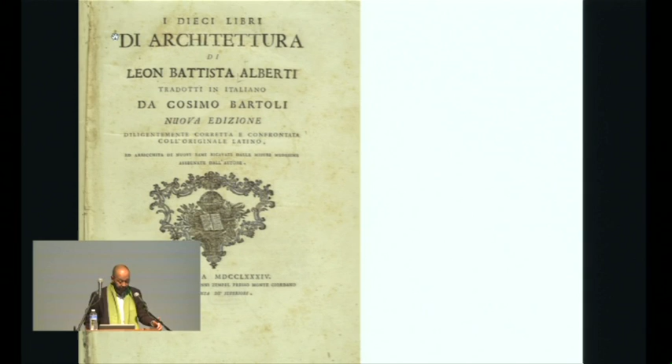And the traits that were present in the city could be applied to the house and to the design of the house. In my mind, this is actually quite problematic, and it goes in line with this notion I've developed over the past few years, which is the narcissistic idea of the architect.

The architect is actually Caravaggio's Narcissus, looking into his own reflection and unable to heed the call from anyone aside. And I would argue that vis-a-vis the city, architecture has been a kind of narcissistic figure, unable to understand that the complexities of the city escape our own professional, theoretical, intellectual capacities.

It's not that they escape in a way that architects were not actors, or even relevant actors, in the design of the city, but that we have been gazing too much in our own reflection, unable to understand the complexities of what constitutes cities and what constitutes citizenness, different from housing.

And clearly, the way that we depict a city is very much entailed in the way that we produce that city. So if we think that the city is about understanding the gaps between the public and the private, between the way we regulate even something as basic as fiscal taxes, the cadastre, we would be producing certain forms of drawings and certain forms of city-making processes, such as the Nolli map.

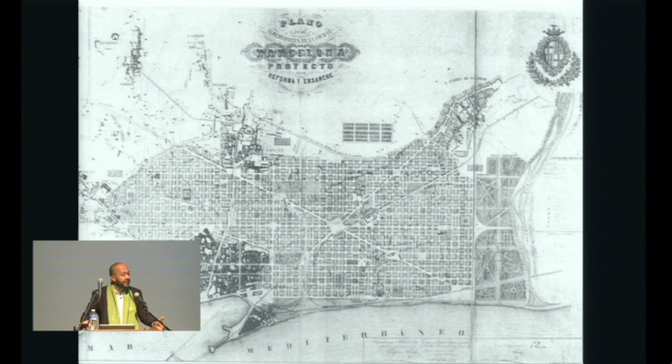And as we discussed this morning during the reviews, if we conceptualize, mid-19th century, the idea that the city is this sort of interactive realm or protocol between the private and the public, the vías and intervías, as Cerdà termed them, we're bound to produce a form of city making which we can then regard as useful or not useful anymore, as relevant or irrelevant anymore.

But it goes to this nature that because they're dynamic systems, the way that we imagine the growth of cities very much entails the possibilities of success or failure of a different city.

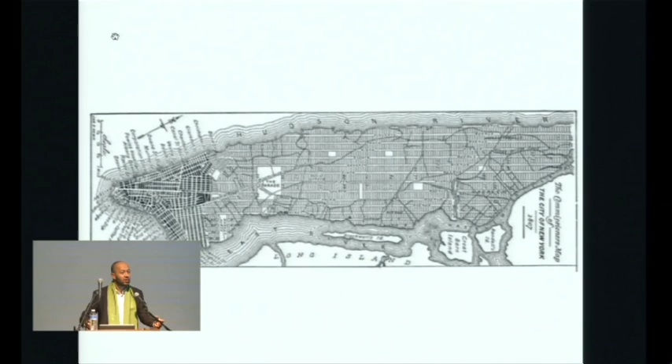If you look at the commissioner plans of New York City, this is 1812, or 1807, we would see a clear decision made about how the city would grow, and we see that something's missing, which is Central Park. The idea of what type of relationship exists between the growth of a city and its understanding of infrastructure, public space, but also land values, real estate development, is at the core of how we figure housing in this equation.

And I think that... I don't know why this keeps coming up. Sorry. No, actually, no, I'll just do this. Okay.

So to think about how we place the question of housing vis-a-vis a city and a nation, one would be tempted to quote the often cliche of the 2000s, which is the idea that we're now in an urban age, and this will be the century of cities.

Actually, for a place like Mexico, the 20th century was the century of our cities. Close to 80% of the population in Mexico live in cities. So the question of how we design policies for cities is at the core of how we imagine housing as well.

But in my mind, I've always found it problematic that the production of housing in countries like Mexico, but also the production of the idea of the large urban project, was connected to the notion of an absence of planning. In other words, when you don't plan, when you don't imagine the future of the city, you produce projects. And I'm not getting into the discussion of the project versus the plan, but I would just say that the history of 20th century Mexico City is a history of substituting the plan, and even the imagination of housing, through the large-scale project.

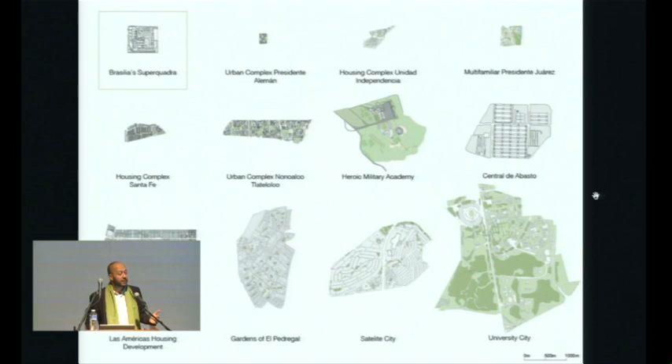And of course, you have to understand this in the context of autocratic regimes. Scale and size does matter, and scale and size becomes a substitute for reimagining better engagements with the city. This is 1946, Mario Pani gets asked to do 200 units of housing, and he builds 1,000 units, drafting another piece of early 20th century avant-garde architecture.

And Pani is, of course, emblematic of this transition and this evolution of the understanding of housing, because even, let me go back, even as complex as one would say this housing project is, it had all the ground floor full of services. It had child care facilities, a clinic, and a pool.

In a way, it was trying to understand how the city could be collapsed into the project of housing. And this idea remains very much for at least 20 years as the core way to understand housing in the city. Probably the last and most dramatic, the high point of this relationship is 1961, 1963.

with the production of 13,000 housing units in Tlatelolco. This is emblematic, and this goes back to the issue of Narcissus. To imagine that a single architect in a site of over 100 hectares would produce and design the 13,000 units of housing, not a single architect, an additional architect in the way, with the exception actually of Pedro Ramirez Vázquez,

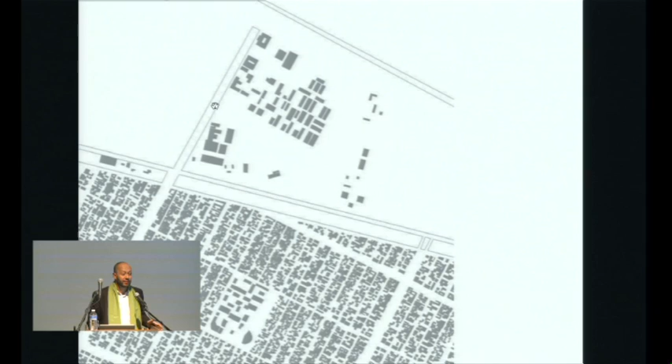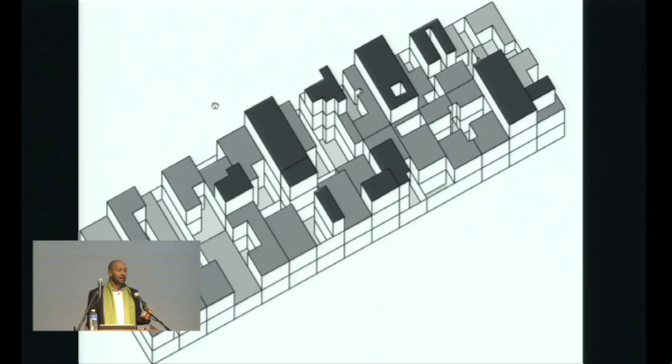And of course, we know the story I've touched upon in my lecture 2 years ago here. I discussed how this process of informality became almost a protocol for city making through its progressive qualities, through its ability to build the 1.5 million community one house at a time, but also through an understanding of flexibility of capital investments, through an understanding of the relationships between housing and urbanism in ways that Pani really did not get.

This is more than just an iconography. This is about fragmenting investment. This is about live-work. This is about multiple households. This is actually about some of the aspirations that city living meant and still means today, which is about evolving, growing, having plus value for a property. But somehow Pani and the housing discourse of the 60s were unable to understand this.

I show this, one of my favorite images of Ciudad Neza, a place where in an unplanned environment, or let's say minimally planned environment, you would have a shop in the ground floor, it's a paint shop, a gym on the second floor, 2 units on the third floor, plus rental units on the fourth floor, plus a Corona advertising on the roofscape. This is in a way the Dutch understanding of density, and keep in mind that this was precisely the things that people like Pani were fighting.

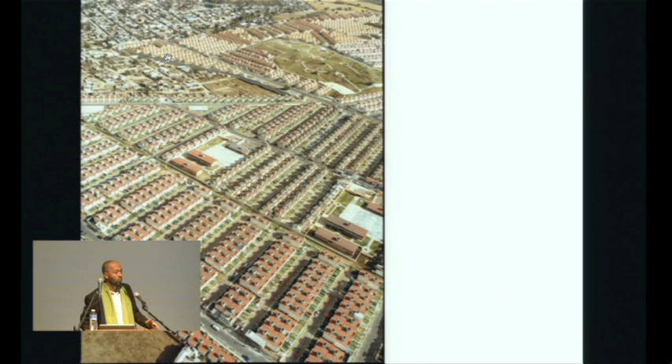These are photographs by Livia Corona, another fantastic Mexican photographer. This is a moment in which large scale begins to play a bigger role again, but also the gated communities. This is minimum wage housing, but if you look carefully you'll see there's a gate here — it's a big, large, urban, poor gated community. And of course every unit has its own parking space, though less than 5% of the people have a car. So this rise of building housing again became the substitute for urbanism.

This is actually a real picture, not Photoshop, and it shows the dilemma of the late 1990s: the fact that even after 40 years of a fruitless fight against informality, in 1999, 60% of the housing was still produced through this informal mechanism.

Actually, this was not a form of urbanism—this was housing alone. And of course, that's the idea that if we understand the city as a house, we're bound to produce models of cityness which will go bankrupt sooner rather than later.

And this deals with the issue of the growth of the city. This is a time where the average city grew in population twice, but grew in size 7 times. Some cities in Mexico grew twice in population over the last 20 years, but extended in size 20 times. What does it mean for resources? For sustainability? For infrastructure? What does it mean if anyone thinks that's fine?

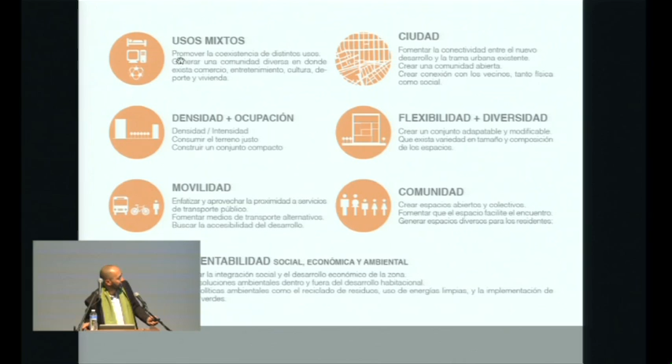If there's one thing I forgot to say that relates to the environmental and resilience crisis of cities and housing in general, it's the fact that the three largest home builders in the nation—actually home builders which had public companies, some of them listed in the New York Stock Exchange—collapsed. They had their own tiny bubble. This is also remarkable: these are home builders that each of them build more than 40, 50,000 housing units a year. But key to their failure is two aspects.

On the one hand, understanding that housing, and especially the finance of housing, is a high-risk enterprise. So the moment that they, similar to the US in some fashion, understood that they would have to be more aggressive in terms of land acquisition, in terms of feeding a pipeline of housing production, they were lagging in many things. This is one of the developments built by some of these corporations gone bust, emblematic of a disconnect with the realities of a system that was bound to go bankrupt.

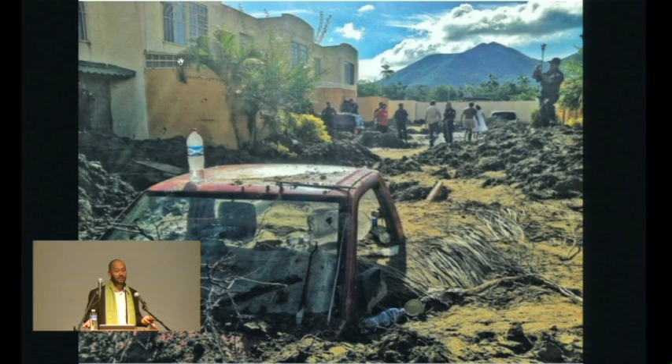So a few years back, I think it was 5 years ago, literally in an elevator conversation with one of the leading directors of one of these large companies, we started discussing architecture and cities. And we actually laid out in 2 minutes the idea of what good city planning meant.

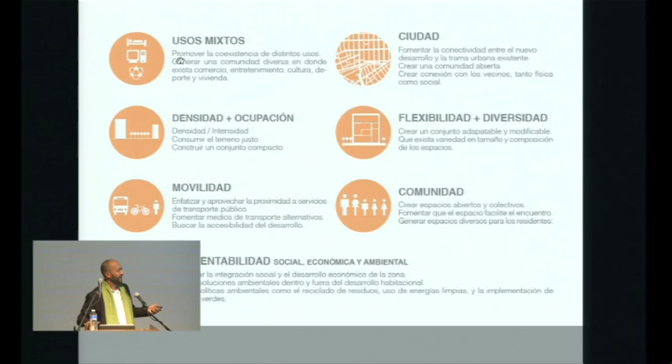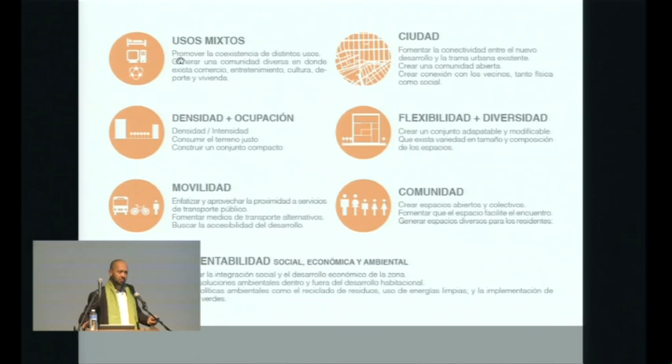And I put this in an almost trite fashion, like saying, okay: mixed use, density, occupation, mobility, community, flexibility, and cityness, and at the end, sustainability. We did the elevator pitch to this guy in this almost classic textbook 101 of good city planning. And the thing of the matter is, he falls for it. He says, 'Oh really? Well, let's take a look at what you can do.'

And this is a developer that builds, again, 25,000 units. It's now actually the largest developer because the 3 leading companies went bust. This is a company that remained a little bit more conservative in terms of financial strategies, and a company that became more interested in understanding housing as part of the city, sort of inner cities.

In a way, we were doing our own kind of politics with the developers. As Deleuze says, with a rock you can break a window or you can build a wall. We found that there are moments and conversations in which it's important to break windows, to be radical—and this is something we discussed during the reviews today. And there are moments in which it's important to build walls. You get a rock, and now what can you do with it? So we imagined that that moment, problematic at first, could be the moment to start building walls.

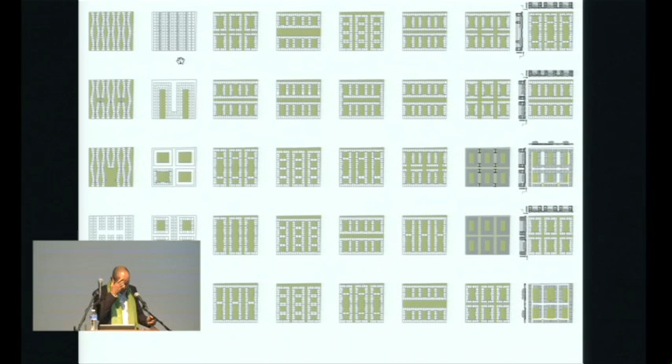We did this not by turning into financiers or becoming politicians, but by actually understanding that architecture is a form of politics, and that architecture and urban design is a form of becoming a financier. We did this through architecture, namely architectural morphology and typology. So we started working with the premise that if we're not able to match the return on investment that a pro forma for a developer has, we're unable to even enter the room and enter that conversation.

The minimum ground, the place where we have to begin that conversation, has to be at the level of asking: can we not only produce a better or at least the same return on investment, but can we actually produce some kind of urbanistic, community, or sustainability plus value to a project? This was our starting point.

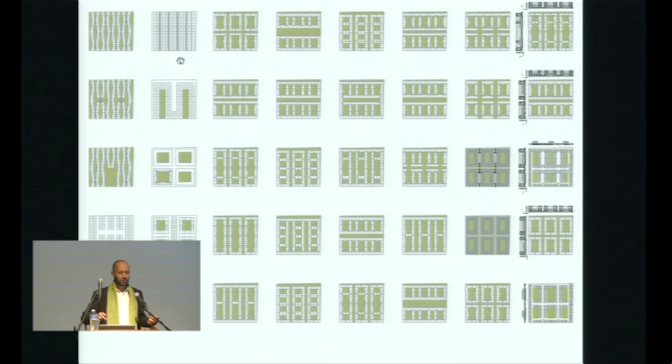This guy asked us to begin by selecting sites with him, which is also a crucial matter. Rather than focusing on just getting cheap land, this enlightened guy within a corporation finds that it's not about cheap land versus expensive land, but how you can produce a system in which the financial understanding of the housing provision model could be done more efficiently. For a developer, they're not against building in the inner city—they're actually against losing 1, 2, or 3 points in their return on investment.

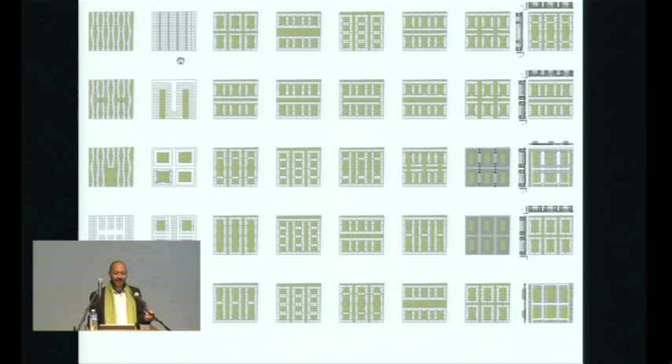So we said maybe there's a way out—a way of finding, through location, a model in which by selling faster and providing other amenities you can gain a competitive advantage. He asked us to look at sites and do quick scenarios like the ones you're seeing here: what's the capacity of a site, what would you do here, what can happen here. We did a very quick exercise showing you can leave 47% of the site open, have 780 units, and comply with every single regulation while producing many units of housing under different typologies.

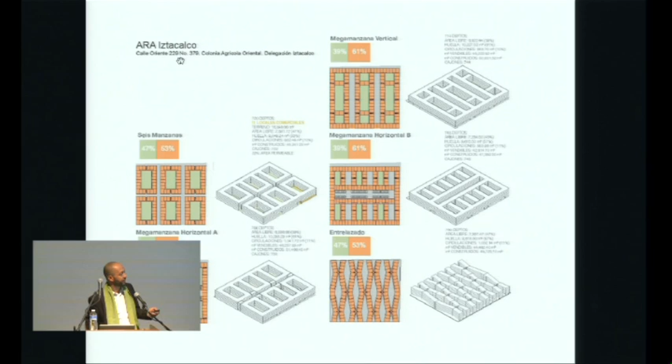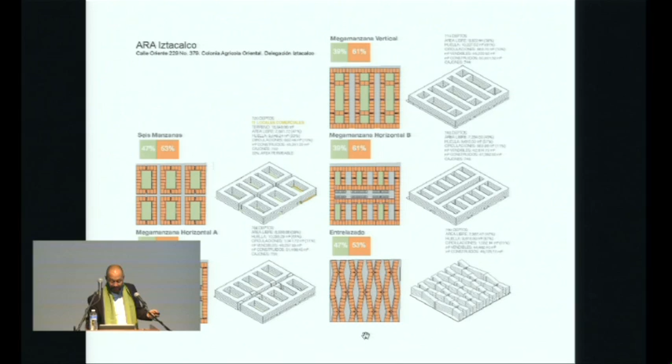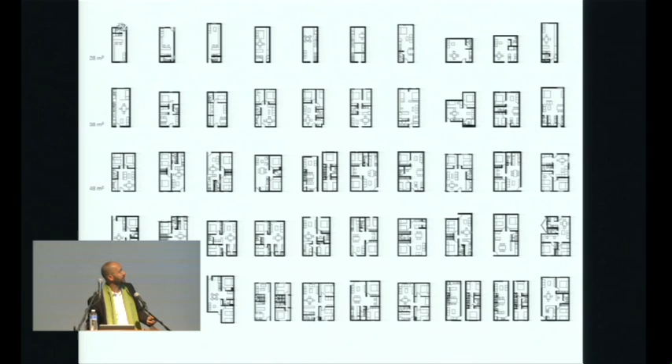Of course, we manage risks. This scenario is clearly more radical than a traditional system of blocks. By showing these scenarios we start with urban morphology, but also show that, different from Pani in 1961-1963, it's possible—and there's a market ripe enough—for multiple demographics and hence different housing typologies. We could develop anything from a small 28-meter studio to 61 square meters, which is the maximum size for social housing in Mexico.

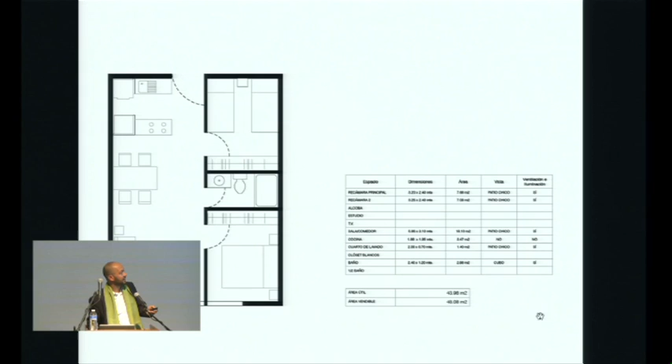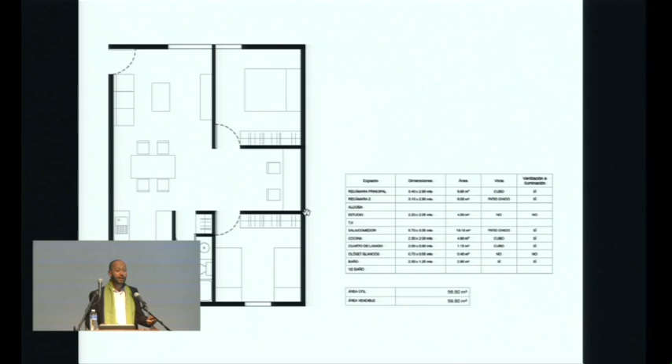The only way to actually make these things work is to connect it to that sort of Excel table on the right—how can you produce added value working through the extreme regulations of a system that produces housing as a financial enterprise? Even decisions of distance and room size, and the structural system of a unit, become emblematic in how we approach reducing construction costs and finding other assets in a project.

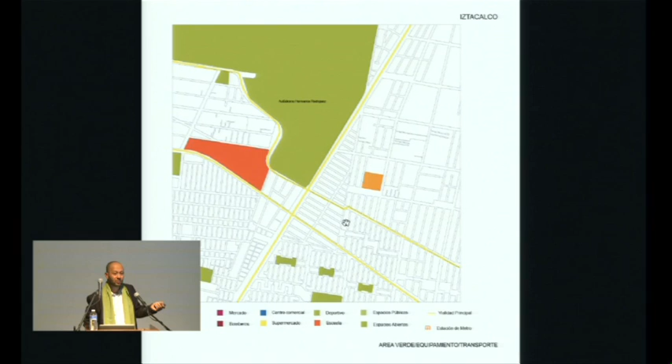The first project, which I already showed in 2012, is this Iztacalco project—1.5 hectares, a post-industrial site located next to a subway line less than 1 kilometer away, and a BRT, a bus rapid transit system, less than 150 meters away. This is crucial. We started telling our client, as a hypothesis, that there's a market for people who will value living close to public transportation more than they value having a small, useless private garden.

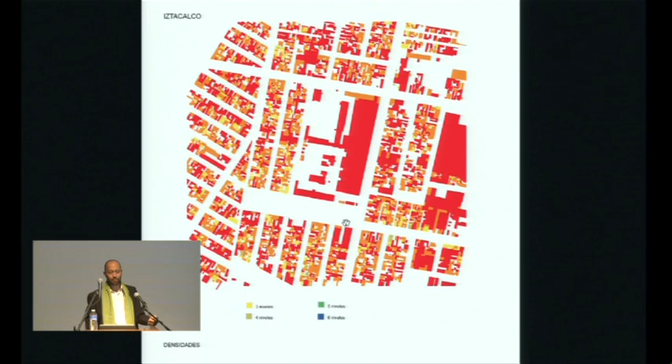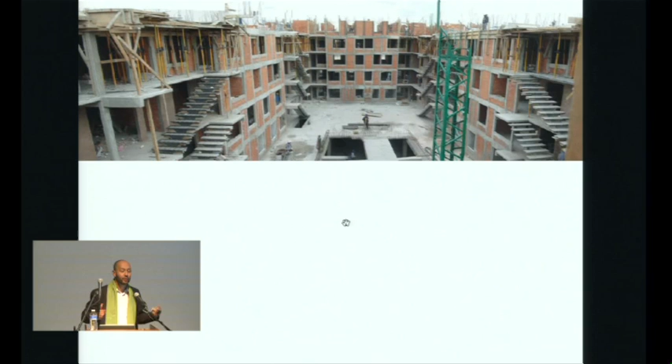So we come to indicators of density. This has 500 units per hectare, which is notable since it's only 5 stories high. But in this evolution of scenarios, it allowed us to present evidence and jointly take a risk, a leap of faith, to see whether our ideas and theories of what makes good urban housing could actually have a mirror in the market.

And of course, the new adventures of urbanization go back to the block—the idea that a housing block can produce certain effects, both in terms of public and private, but also in terms of sustainability, privacy, and publicity, which are relevant.

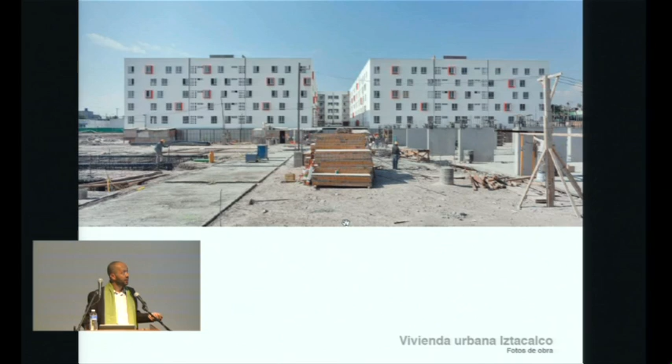In 2012, a few months after I lectured here, we won the National Housing Award for this project. It's quite enlightening for us, because it's a project in which the virtues happen through different channels than just architectural innovation. In a way, it's quite discreet—5 ideas which we were able to convey first to the client, second to the market, and finally to authorities.

First of all, it's about the public space and the relationship between the public and the private. Unless we're able to construct community—which some of the gated communities of the 90s and 2000s weren't able to do—we're bound to produce housing as just a financial enterprise.

Second, it's about diversity in typology: 750 units, close to 9 different typologies, with small variations in size, showing that the market demands more than developers are sometimes used to catering to. Third, make the parking disappear—there are no parking reductions in these housing projects.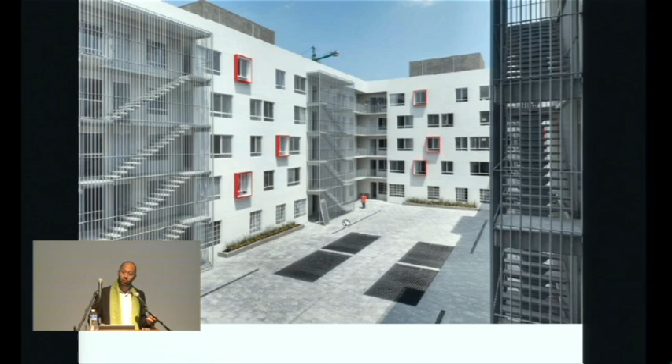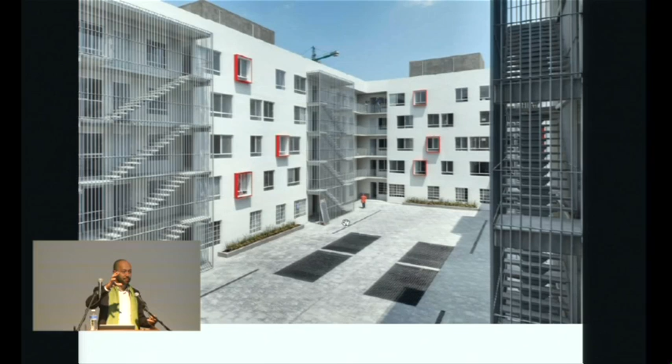We're unable by law to provide less than a single parking space for housing units, which is dramatic. This is a place where the motorization rate is less than 300 cars per 1,000 inhabitants. It shows that it's not even a market match. We're overproducing parking spaces. The moment someone buys the property, even if they don't have a car, they'll start thinking about the car. It's dramatic, but we need to comply with it.

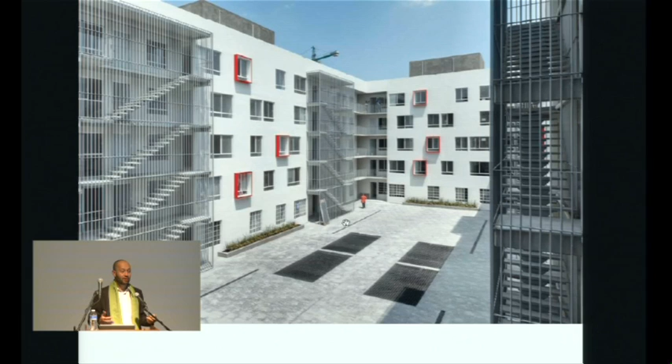The thing we can do is make it less relevant. If you compare the pictures, the honest-looking ones where, due to costs, everyone was doing surface parking, it meant public life, community, pedestrian life disappeared to the cars. So the cars go underneath, which meant savings in terms of foundation, since this 5-story building could compensate with a foundation to put the parking in, meaning actual savings for the developer. This project was 6 blocks developed over 3 stages, but it started selling so quickly they had to do it as one continuous single stage.

The fourth idea has to do with the ground floor retail, on the eastern 2 blocks. There's 15 small units of mom and pop shops, retail, which within the corporation we were told will never sell—we're a business of doing housing, not retail. Of course, we put in a small shop, and they sold like this. So now every single development they're doing, they are producing ground floor retail.

These images, by Moritz Bernoulli, show the way some of the units have been occupied. If I told you this is social housing—less than 35,000 pounds, roughly 64 square meters, 35,000 pounds more or less—there's a kind of aspirational aspect to it. This is clearly not the low-end housing we tend to associate with social housing. These are cross-ventilated, every single apartment faces 2 directions, exterior and interior, forming community building which doesn't necessarily happen in other housing typologies.

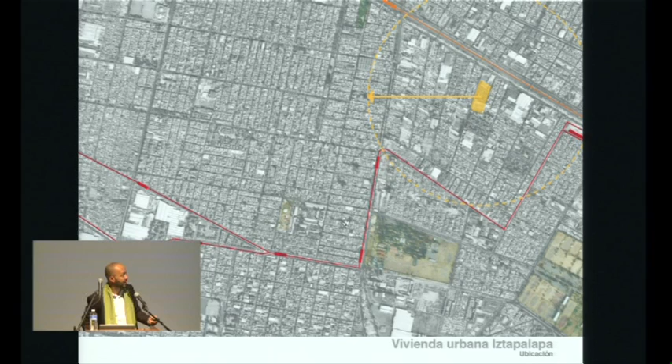After the success of this project—and by success I mean a kind of understated recognition, both the prize and, more importantly, the fact that the developer called us back—I said, do you know what, I'm starting to buy larger lots, same model, less than 450 meters from public transportation, places where land still wasn't as expensive but where there could be some form of densification. We're not talking high-rise, not even mid-rise, but 4- and 5-story courtyard and block units where we can achieve over 450 and 500 units per hectare.

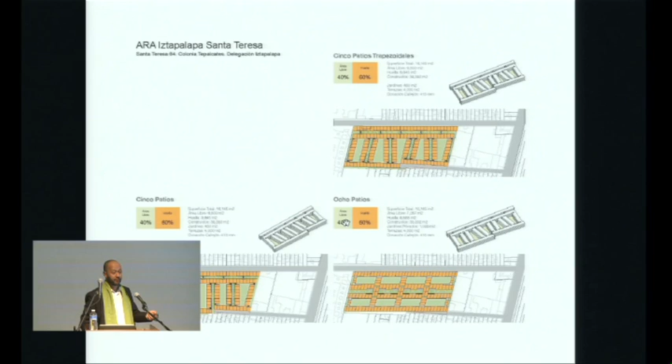So we do the schemes in the same fashion, trying to convey the scenarios. What are the risks? We think home builders by nature are conservative, and it's reasonable to be so, especially publicly traded companies—they have a responsibility to stockholders that goes beyond a communication or rapport with architects. If architects can get beyond the narcissism of 'we're not heard,' it's actually more that we're not hearing what's at stake. But scenarios allow us to jointly manage the risks and innovate.

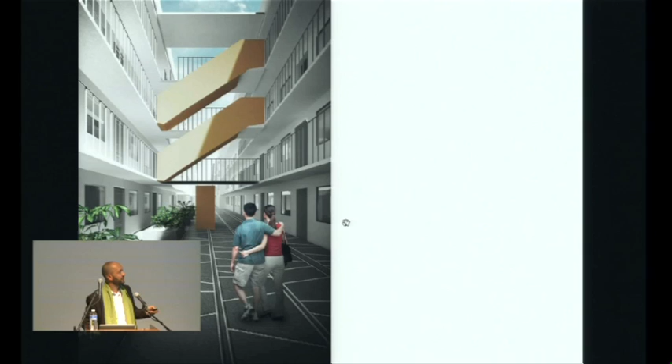So in this other project in Iztapalapa, it's a 5-courtyard project, close to 500 units. If you look at the early courtyards from the first project I showed you, they did nothing with the landscaping and the courtyard. Our project for landscaping involved vegetation and programming for different seasons—one courtyard was for young kids, another more for adolescents.

In a classic developer's fashion, they completely ignored us and said no, we'll leave the courtyards empty. Now, in the second project, because they do surveys and research after selling, they find the single most important reason people give for buying that project instead of the competition has to do with the public space. It's a recognition that what people value is less about a private garden and more about other forms of association—and this is where architects tend to have a role. So in this second project, the landscaping will actually be built. The guys came up to us and said, well, you know what?

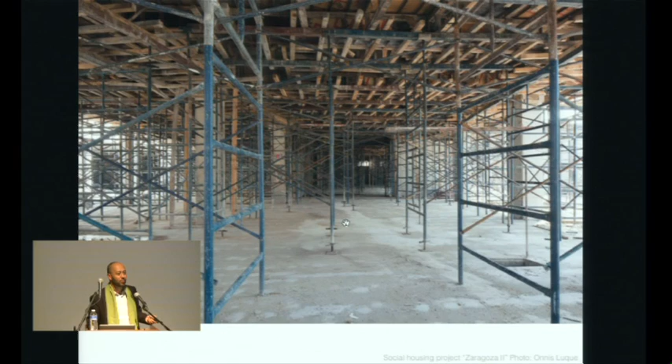It's more important what we tend to value, and this is getting built as we speak. This is in Iztapalapa.

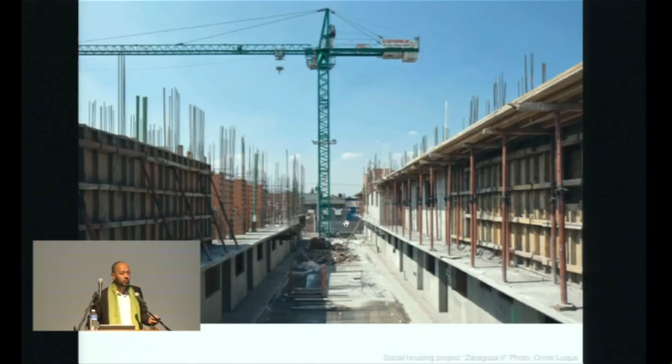Again, no frills. For us, it's actually quite basic to learn to pick our battles—where can innovation happen, where our added value can contribute to producing a different model of housing. Just to win this battle for us is fundamental.

The third project is in Colonia Doctores. This is also next to a metrobus, a subway station, and a BRT corridor. It's become like a formula for them to see the developer now looking for these transport-oriented land purchases. For us, it's a remarkable win.

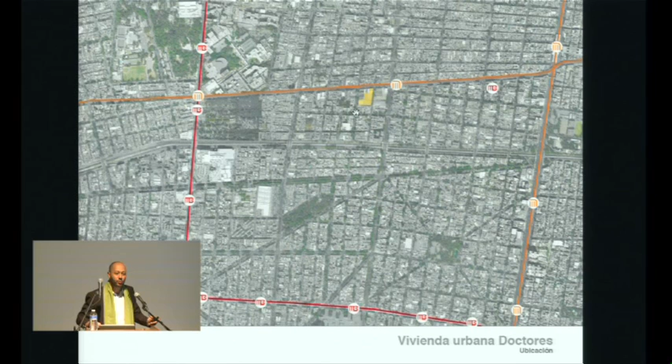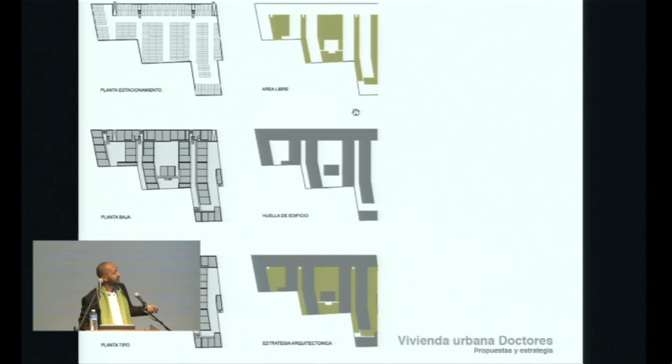If they had followed the status quo, something different would have happened. Again, it's a similar model, focusing on those 5 strategies: hide the parking, produce public space, create different typologies, do retail on the ground floor, and find ways for community to be built in another fashion.

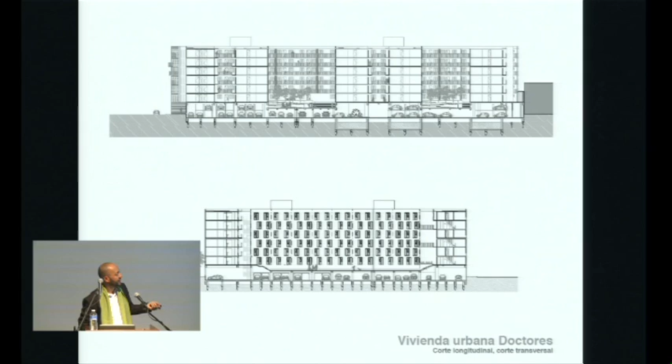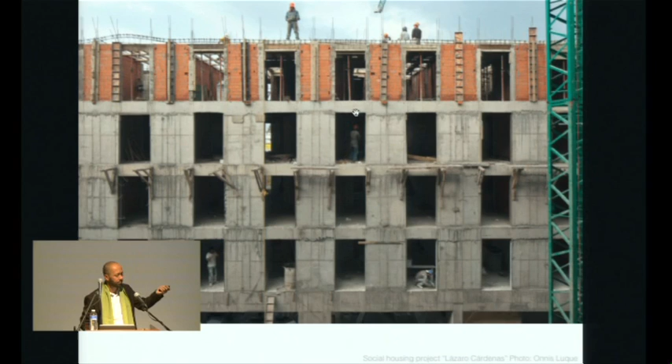These are pictures from a month ago, and I'll show some more recent ones. They've sold 98% of the units at a time when less than 30% of the construction has taken place.

This for them is absolute bliss. You can imagine, if selling a home is a financial operation and not a protocol of urbanization, for them the faster they sell, the more money they make. And I say this with zero cynicism.

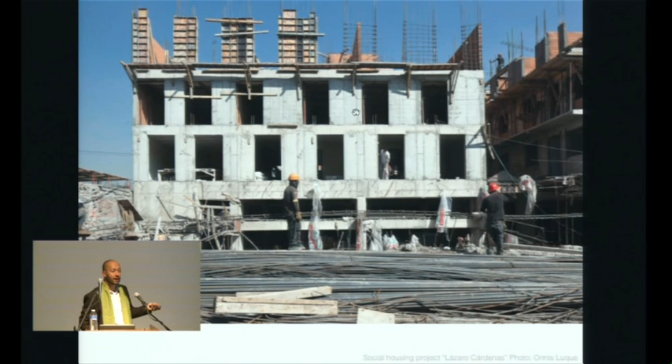I mean it—the way we can return a conversation about urbanity and the production of more effective housing and urbanization policies has to do with playing that minimum field. It's like stepping into Wimbledon: you at least must be able to not double-fault every time you're serving. The partial success of these projects has to do with raising the bar a little and engaging a key stakeholder.

After the third project, what's remarkable for us is that even at the level of the industry, home builders are looking to the successes of ARA—our client—and beginning to replicate the model. It's not that we were the first nor the only.

We just happened to be in the right place at the right time to engage in a conversation with a key player. Now even authorities, both federal and local, are looking and learning from the process. The Ministry of the Secretary of City Planning has actually asked us to present how these new models could produce better urban housing.

So these are views of the construction site. In a way, especially here in Europe, it's a little almost irresponsible to say there's a level of innovation here.

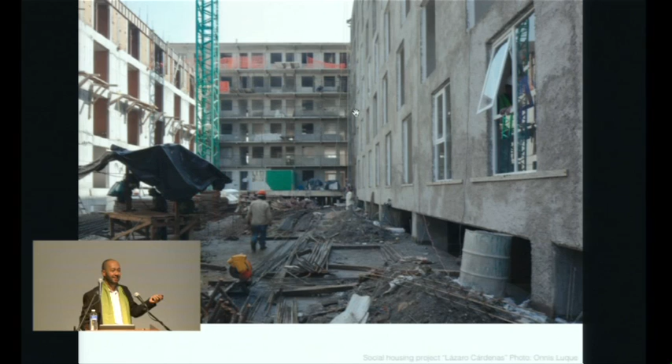But in the context of Mexico, in this 50-year history of housing production, in a place where over 650,000 mortgages will be applied every year—close to half a million of those being new housing—to engage in that conversation is crucial.

For us, maybe if you compare this to the first one in Iztacalco, there are moments where we could be tempted to pump up the volume a little in terms of architecture, in tiny battles that have to do with iconography. But for us, the urbanistic assets these projects have are more important than even a kind of bland architecture that shows.

For example, this was the first time we tried two typologies—what we call the duplex, a 60 square meter unit developed over two stories—which the developers were originally very hesitant to look at.

They said, no, if people want a house, they'll buy a house in the peripheries. We said, no, I think you're wrong—people want the best of both worlds.

These were the first units that sold—even before the first foundation was put in the ground, those units had sold. The second unit that sold really quickly is a tiny studio, the 28 square meter studio. It's beginning to show developers that if they take some risks, they might get returns.

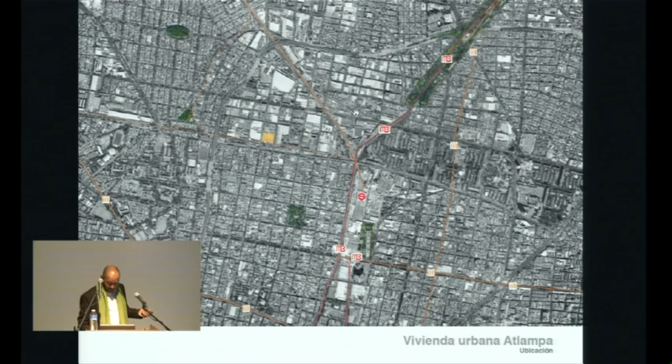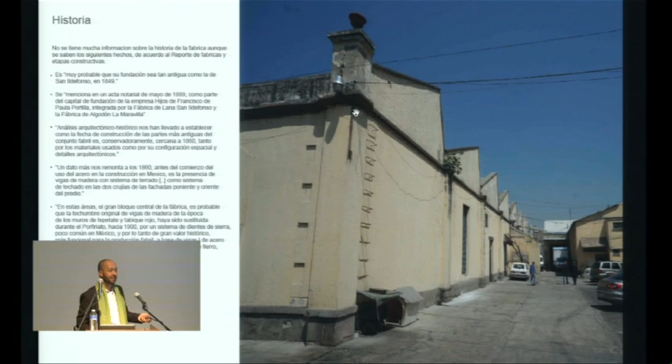The third project for us is also remarkable because we've gone to the next stage, which is to actually use the system as a mode of negotiating with authorities, to present our ideas that urban housing can allow for land use changes and even for political mediation in the context of complex urban dynamics. This is the area of Atlampa, an industrial site very close to the historic center of Mexico City.

This is Avenida Insurgentes. Again, same condition. There's a suburban train line here that goes to the peripheries of Mexico City. There's a subway line here, and there's a BRT line, actually one here and another one here. And this is a site in which we're asked to do a project where there's an old factory, an early 20th century factory, which belongs to, it's actually national heritage.

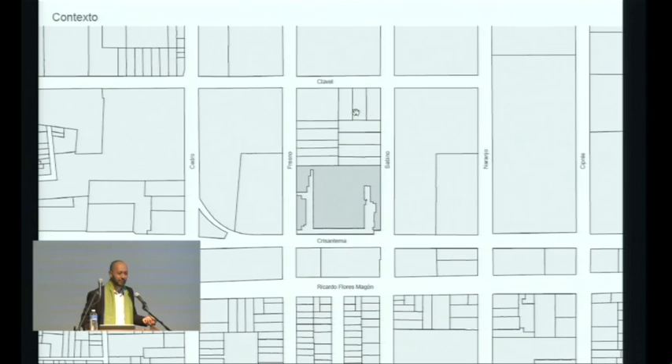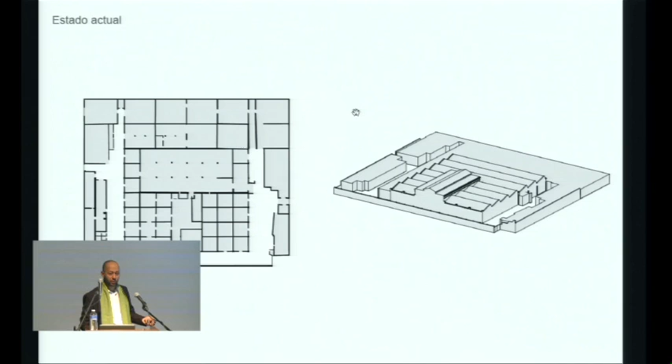So in a classical developer's fashion, they say we have to find a way to demolish the building so that we can do as many units as a business requires in order to purchase the land. So we tell the developer, same client, what if we're able to produce the same amount of units and we preserve the factory and we do something different and we use the existence of the factory and the remains of the factory as an asset to the project.

And they tell us, well, that's not going to be possible with the current authority. So we put ourselves in the situation of lawyers presenting, rather than having what we call a gestor, which is kind of a broker, which tend to be somewhere in between lobbyists and technicians that deal with the change and land use permissions. We put forward the proposition to the client that if we're able to convince them to preserve the capacity of density in preserving the factory, it would be like a win-win-win situation.

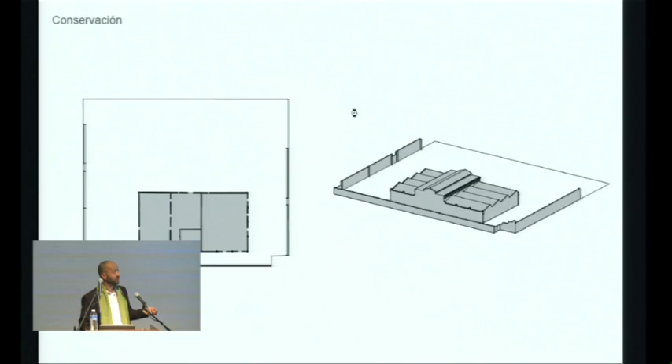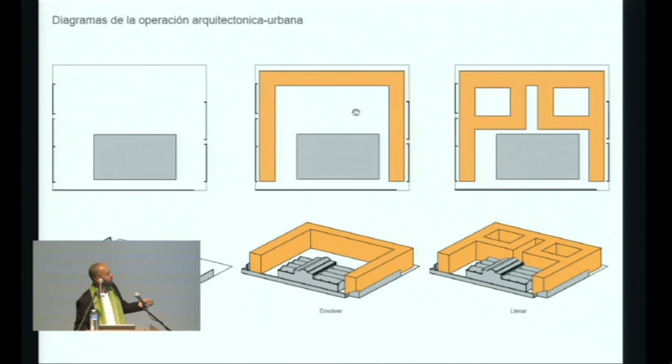And this, like I said, is an early 20th century building, actually with some very nice moments, especially in the interior. Has a wooden structure with a major section here, and then a series of skylights facing north. So in a sense, we're sort of wrapping around, we're building courtyards, and then we're extruding.

But to actually see how this gets processed and how we communicate to authorities, this is literally the presentation that we did for the city planning chief. And we said, okay, under current regulations, this is what you could do, which takes us to preserving at least 40% of open space and building a number of units.

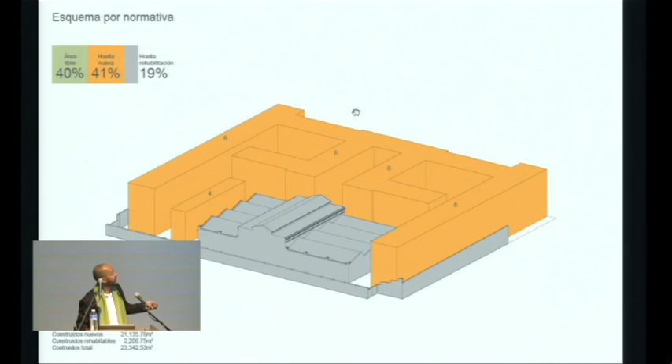But what if we're able to use the potential, which is not in regulation, it's kind of absurd, but it's not in regulation, to be able to use the potential that the space over the factory has and to transfer it to the top of other buildings. It would mean a 9 and 8 story block.

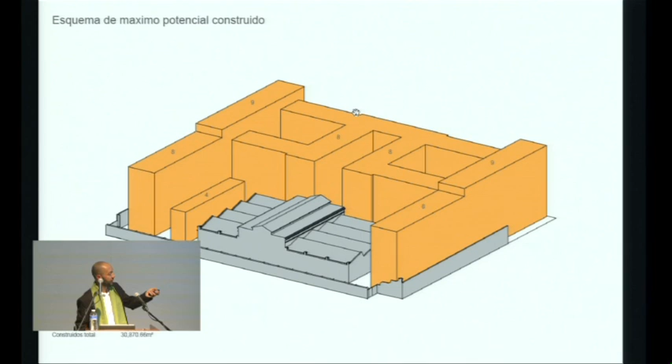But if on top of that we use it in negotiation, we scale down and have a sort of recognition. It's almost like a classic architectural maneuver. What do you do in the context of national heritage? But we get them to 346 new housings, which is 50 more housings than they originally planned.

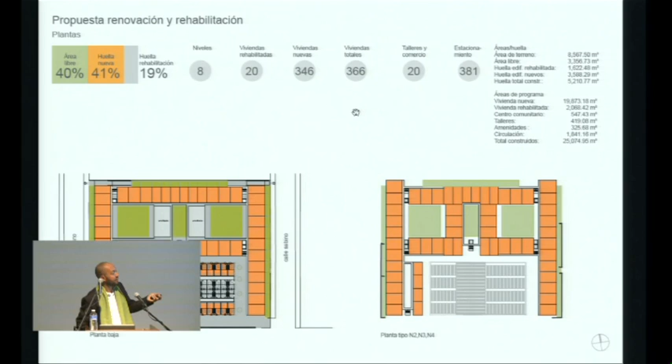And we do 20 rehab units on the peripheries of the existing factory. And we do 20 new spaces for retail and workshops. So the client tells us, and of course the same issues about parking underneath and things like that I won't repeat. But this is literally the scheme that when we presented to authorities, they said, this is fantastic.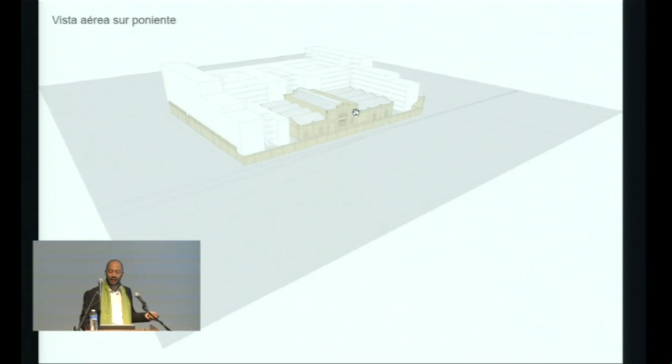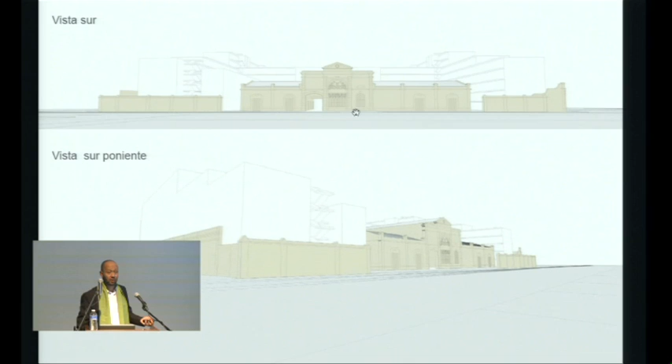We don't get developers who are able to do that. It's usually like a zero-sum game. What we lose, they win, or vice versa. And the city planning authorities approved of this situation. The land use change is under process, and hopefully by the end of the year we'll be building this.

But in my mind, it goes beyond, again, a traditional understanding of how do we visualize housing vis-a-vis the city. It's actually about understanding that architecture requires, at the same time, a diplomacy and forms of negotiation in spheres where we don't usually tend to operate.

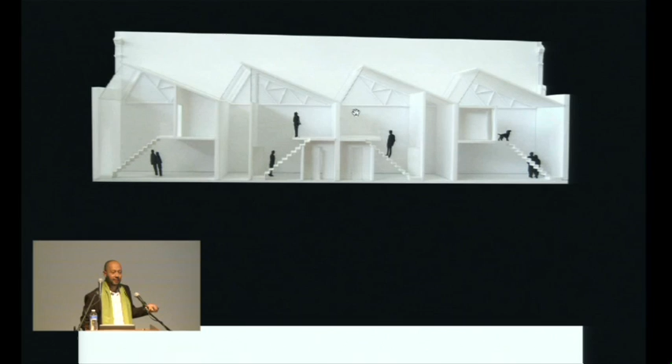Of course, it would be nice to have some of these units which will reuse this. Again, to talk about this in Europe, it's almost like embarrassing. I mean, you do this all the time. But in the context of us in Mexico, it's really the battles that we are putting our all energy into.

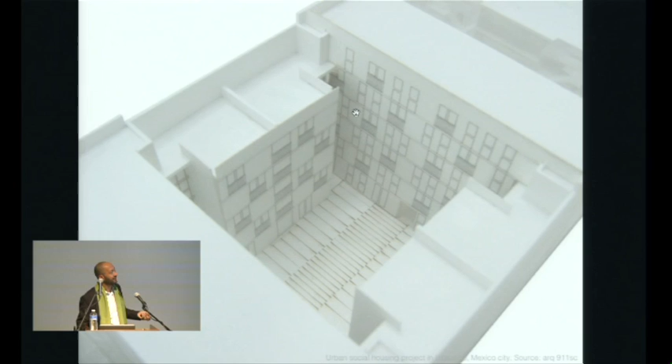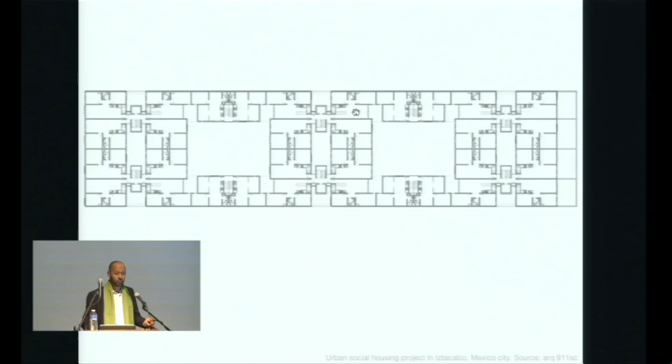A second developer calls us, and now they see the success of that first developer, and we're developing a project for a developer called Marca Urbana, much tighter site, but the same model of privilege. You're able to give more public space because at the end of the day, you'll capture that in the context of faster sales and better construction projects.

Basement, two courtyards facing the exterior, facing the inner courtyards. And again, little by little, we're producing, if not more interesting, but at least an architecture in which we feel more at ease showing in architecture schools. And these are just the renders.

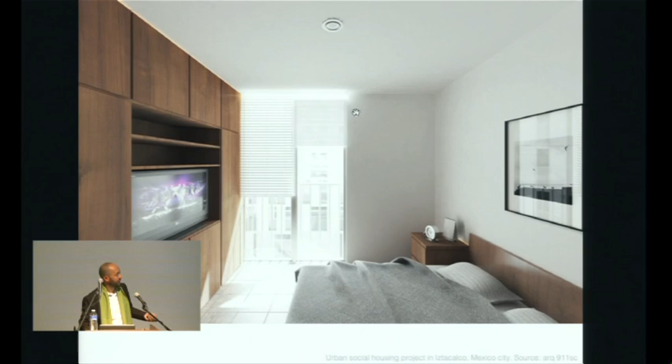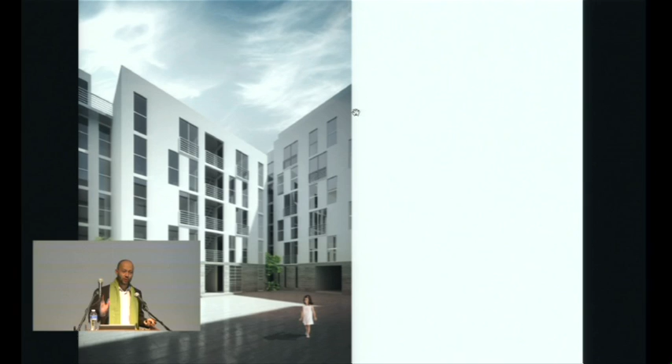But again, this is not only a model of housing; it's a model and understanding of urbanity. If you think of the advertising I showed you with a girl not able to walk out, it's a mediation between the semi-public space of the housing estate, where you can have some form of city building and community building beyond what I called refrigerator magnet urbanism, where you have every single magnet to call for cigarettes, pizza, milk, or karate lessons. You do not need to go out to the city, and hence it's a collapse of urbanity as we know it.

Finally, I like to show the last aspect we're working on. This is a project that Saidee Springall, my wife and partner, developed after getting a fellowship from the National Endowment for the Arts in Mexico, called Norm and Exception. We're looking at how land regulations, building codes, and state and federal codes are actually the straitjacket producing a particular kind of urbanity.

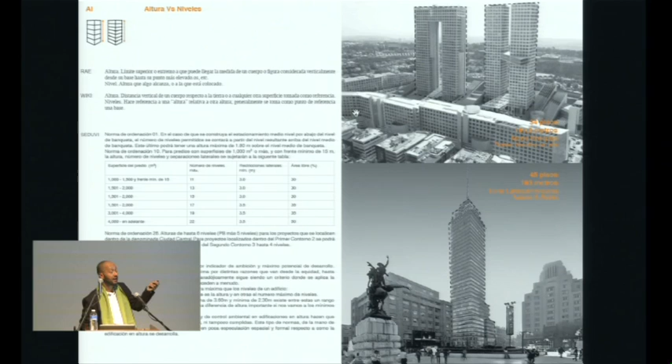It's about not getting mad at the lawyers, but getting even in a way, uncovering the processes by which these regulations play out when you codify height levels of a building, when you codify the coefficient of occupation or the FAR, when you regulate minimum dimensions, which is sometimes actually quite stupid, because in terms of habitability, they're unable to recognize that someone might rather live in a 25 square meter unit because they're alone, they work at home, or they don't want to pay more to live farther away from the city.

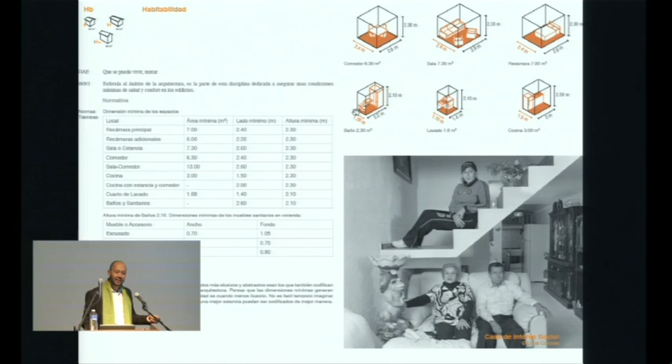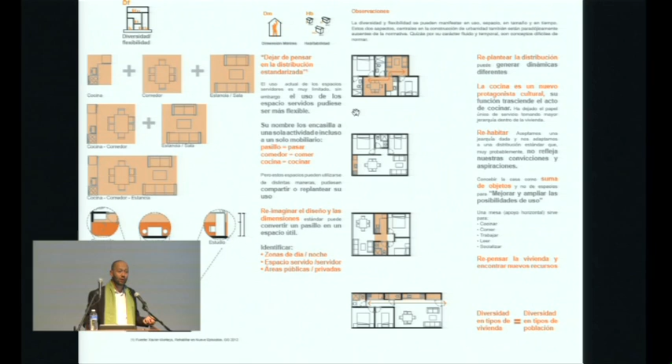So to expose these things, we've actually been in negotiation with people writing these laws, doing a kind of light lobby, to say some of these regulations are actually the hindrance for better urban housing. Change the code and you change the city. Change the code and you change the way that you produce the city.

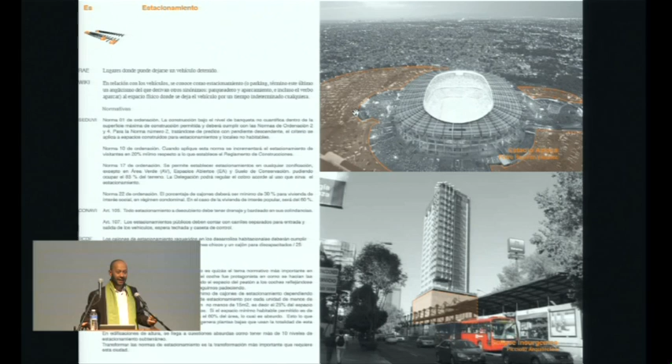The most interesting thing about parking, which is the most radical, let's say, anti-urban regulation—just a single word in the code would mean that instead of saying minimum parking, you should change the word to maximum parking, and then let the market decide what's the best way to produce housing. But these are obstacles which we need to change in the context of planning policy and regulations.

I'm not sure if this is the last one. I end with this because to bring back the discussion of how housing can be literally the Trojan horse in producing better cities, we have to assume the complexities that the city is not a house, or a large house, it's not just the accumulation of houses, it's not the numerical amount of housing, but actually the city is the accumulation of regimes and planning protocols, from legal to regulatory, from construction to financial. Unless we, as architects and urbanists, are able to engage those multiple facets of the production of city, we will not be able to produce better housing, or even worse, not be able to produce better cities. Thank you very much.

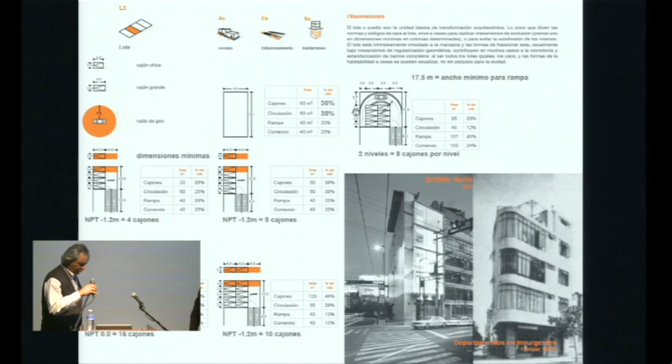Okay, next time you come to London, I will take you to a stadium that has solved much better the problem of parking. It's much nicer architecturally, and where I think they play much better football. That is Arsenal, obviously. Anyhow, even if I root for Chelsea and Jorge still invites me, I will be more than flattered. Are you a Chelsea supporter? I didn't know you were a Chelsea supporter. I thought you went just for curiosity. Anyhow,

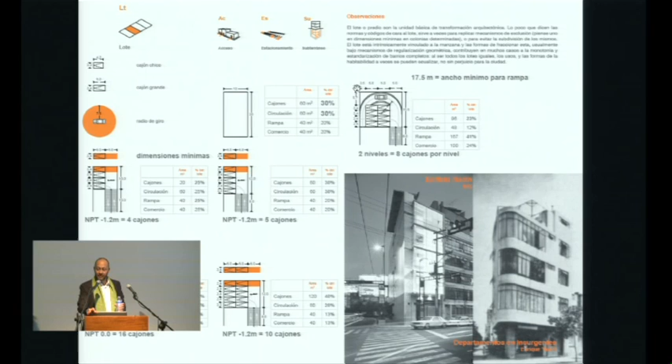It's not that there's no money. We're talking about housing, but financing infrastructure is a whole realm in itself. If you connect and reconnect, in a more strategic fashion, the project of urbanization and the construction of civitas and urbanism at large through housing, you can actually change the rules of the game.

We're too soon to know how these new rules will play out, but at least we're making an effort. When I talked about diplomacy, playing the equivalent of a lawyer, we're doing that so that speaking in financial terms isn't so far off—it's just shifting the way policy works. Of course there will be a transition: let's not do without parking entirely, let's reduce parking in half and use those resources for public transportation, water, and energy.

I think there was someone in the back. Who else would like to make a comment or ask a question? So we have two here—is there anyone else? What I suggest is that we take all the questions and then you respond.

I wanted to ask you, what do you think about self-built communities as a model for the evolution of the city? Because you said change the code—if you change the code, you change the city. But how do you envision it as a mode of living in society?